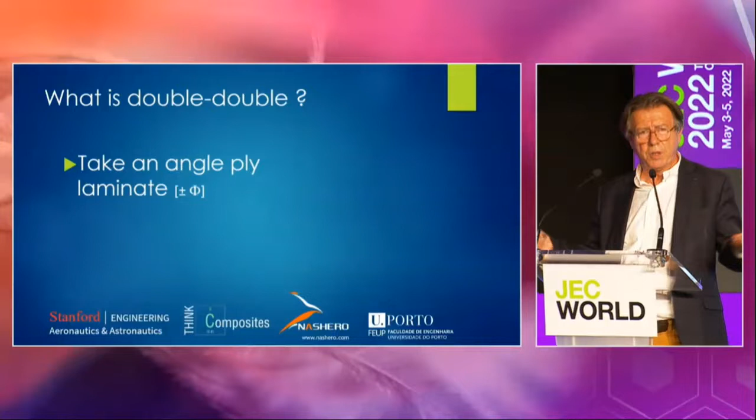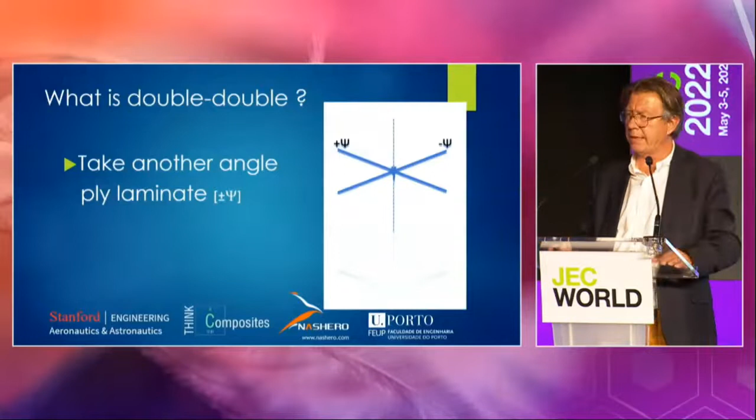So what is a double-double? What is behind double-double? It's a very simple concept. You just take an angle ply, two orientations of fibers on a material, and we call that plus minus phi. Then you take another angle ply, plus minus psi. So you have two angle plies, and you just stack them together, and you get the building block of a double-double.

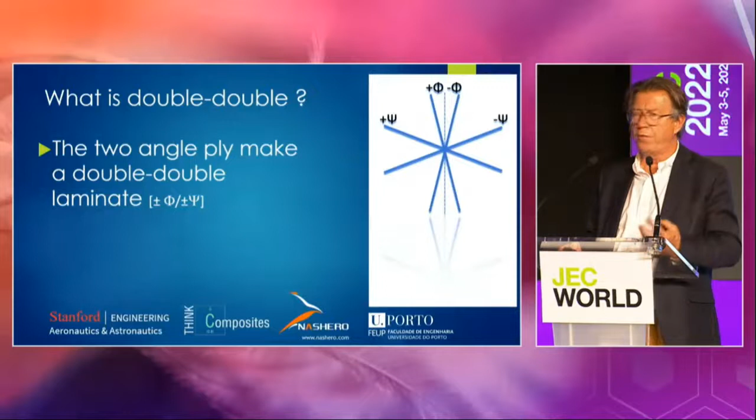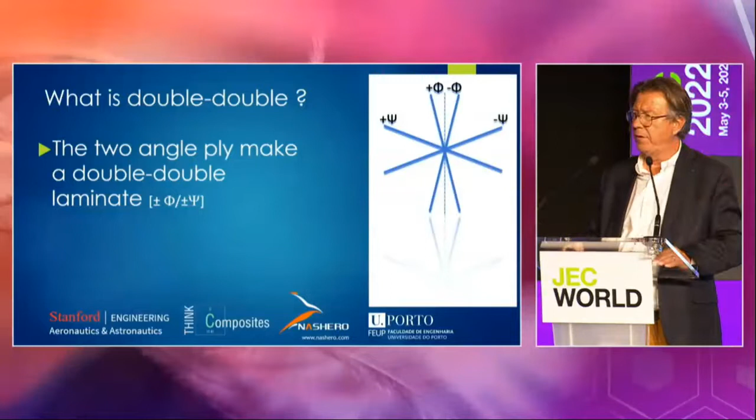The building block is a set of 4 plies: plus minus phi, plus minus psi. Phi and psi can vary from 0 to 90, so you have a continuous world of double-double. A double-double always has 4 plies. So your pattern, your building block, is always 4 plies, and you will see that this is a real advantage over any other laminate.

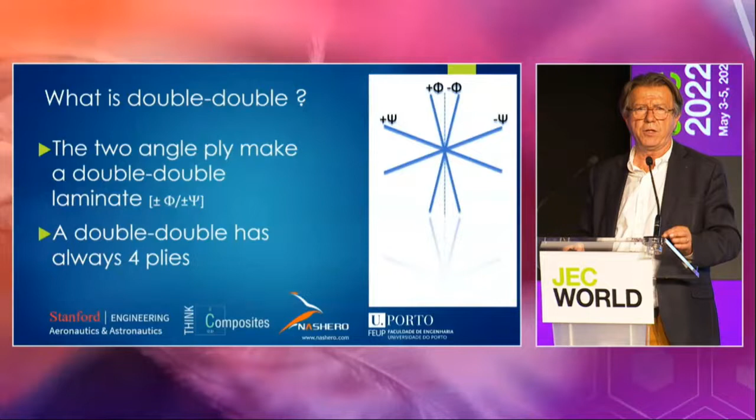And a DD laminate, for your use, is always built as a repetition of the building blocks of this 4-ply system.

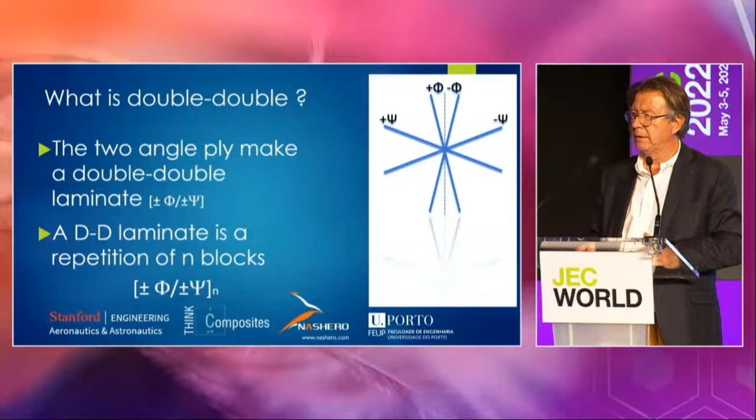So what is the comparison with the quad, for instance? In the top part of my slides, you see the classical quad. The most classical is the quasi-isotropic, 0, 90, plus minus 45. Then we have shown what they call the hard laminate with more zeros, and the soft laminate with more plus or minus 45. These are the basic laminates you always find in aeronautic applications - either quasi-isotropic, or when they need hard or soft, one of them.

But what you see is the number of plies in the building block is increasing as you go from left to right, whereas we can replace it with a double-double with exactly the same stiffness, exactly the same strength, but the building block is always 4 plies.

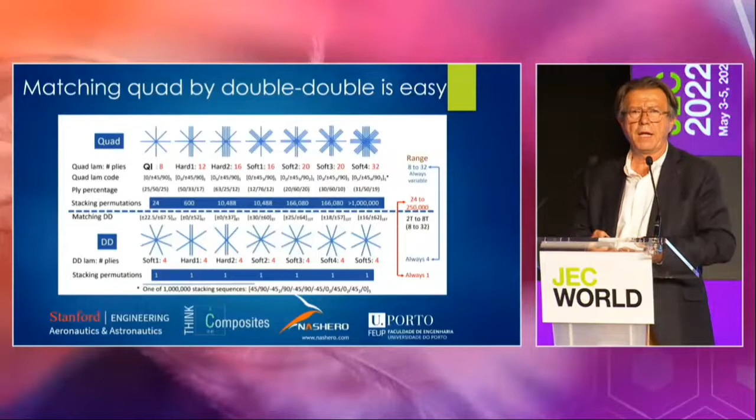So you get a very big advantage in the facility, the ease of construction of your laminate, because you always have the same pattern, and you just repeat it through your laminate.

So if we compare quads, and weigh the pros and cons for quads - quads are always difficult to design. It's not that easy. I've been doing that for many, many years when I was young, and designing a good quad takes a lot of numerical skill.

Manufacturing is not always easy because you need to check - how can you check and ensure that all your plies are here and in the right place? Tapering is almost a nightmare. If you want to go from a thick laminate to a thin laminate, which one do you take off? 0, plus minus 45 - how you connect these together, that's the nightmare for numerical designers.

So if you compare the advantages, you find there are not many advantages, and sometimes people just give up on composite materials because of this. When Airbus says sometimes the next plane will be aluminum, this is because of quads.

So if you turn to double-double, you see there are all those advantages: it's still lightweight, it's homogeneous - and that's a very important word, homogeneous - orthotropic, easy to taper, and easy to process. And suddenly the balance goes the other way, and this comes out the winner.

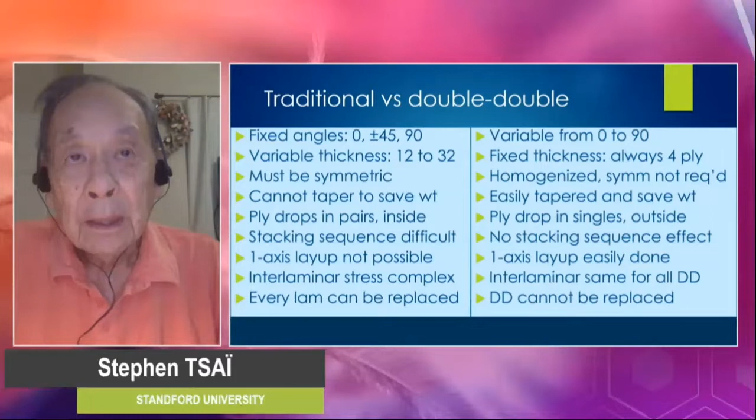The first slide will show the difference between traditional laminates and the double-double. As you can see, traditional is on the left, where you have fixed angles, 0-90 plus or minus 45, but variable thickness from 12 to 32. Whereas double-double on the other side has variable angles from 0 to 90 and fixed thickness, always 4 plies.

So when you have only 4 plies, you do not have to make the laminate symmetric, because you can homogenize it using a repeated number of stacks of the 4 plies. That makes it very simple. And you can taper it, reducing the number of repeats from 10 to 9 to 8, whereas with the quad you cannot do that.

In terms of ply drops, the traditional way has ply drops inside the laminate, whereas in double-double we can have ply drops as singles instead of symmetric pairs, on the outside. The stacking sequence is always a problem with quad, but there's no stacking sequence effect with double-double because there are only 2 possible stacking sequences, so the issue goes away. We can have one-axis layup with no cross-plying, and the interlaminar stresses, when homogenized, are the same for all double-double. Every laminate can be replaced by a double-double.

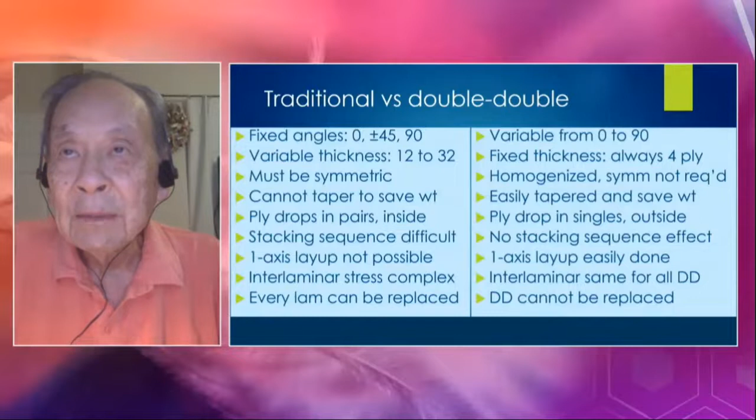May I have the next slide, please?

Here's the difference between heterogeneous quad laminates on the left versus homogenized double-double on the right. As you reduce the thickness to save weight, the homogenized double-double remains constant in properties, whereas the quad cannot.

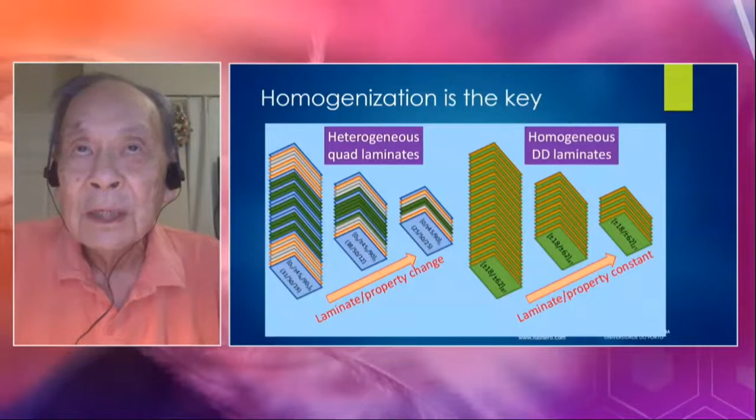May I have the next slide? Here is an example of how you can do a stringer, reported in the book in chapter 3. You can taper it from the toes, where you have the minimum number of plies, 4, up to the thickest section where you need it, which is 8 plies. So it's very easy to do.

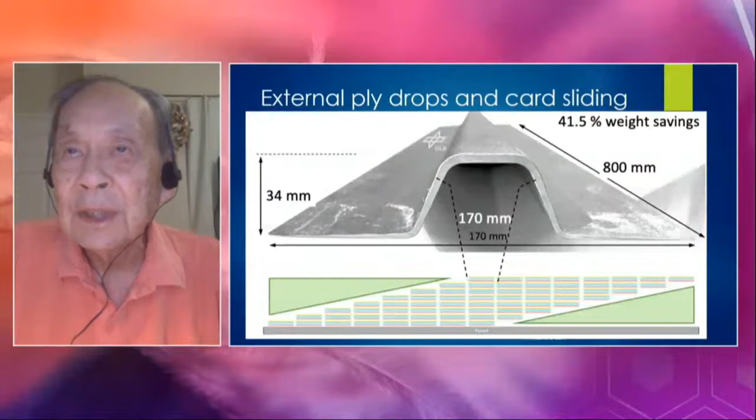This is done by card sliding, so in terms of layup it's very fast and less prone to error. In addition, you get the natural taper all on the outside. May I have the next slide, please?

So finally, we have a demonstration model showing the grid, and we are proposing to use a metallic grid, which is easy to manufacture using a water jet or fiber wire shaping. We take advantage of the negative thermal expansion of the skin at plus or minus 60, so you can assemble this by chilling both components and putting them together, without glue and without fasteners. The layup could be one-axis layup on the skin, done without any complicated tooling, and with no issue with molding and demolding and so forth.

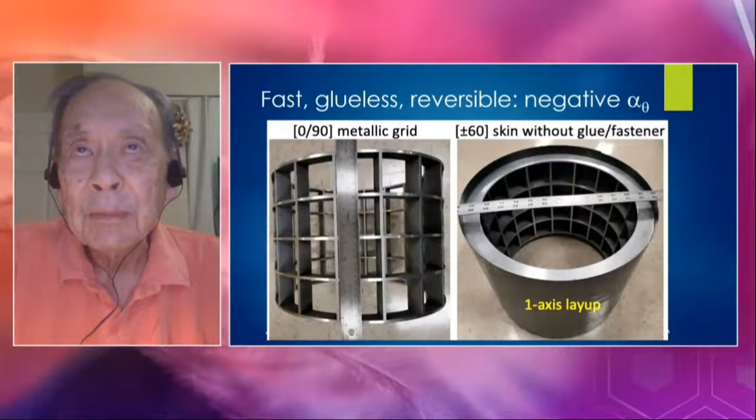So this is what we propose, and thank you very much for your attention. We will be around to answer questions.

Thank you very much for your attention.

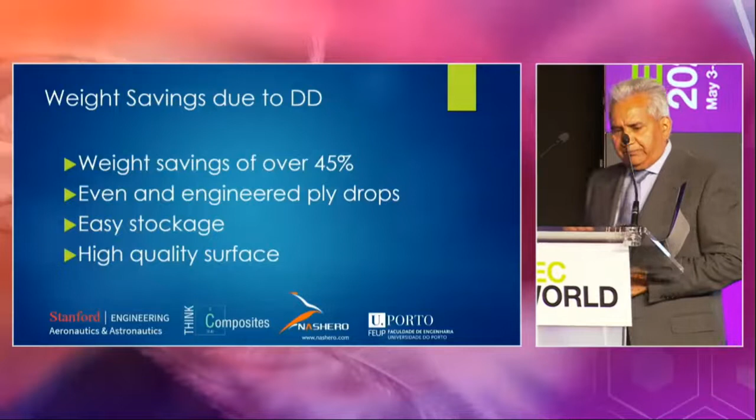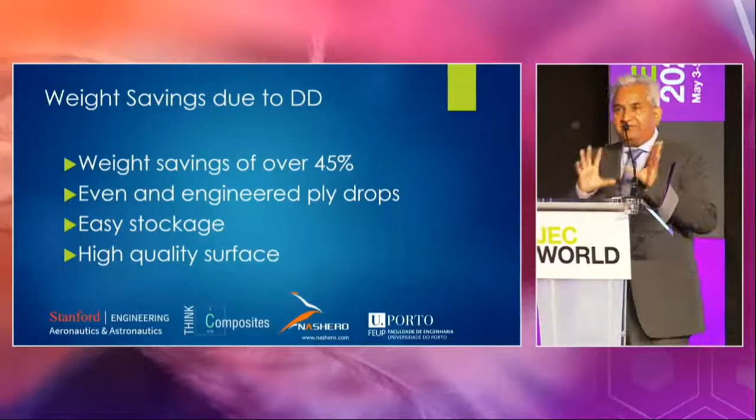If I can move to the next slide. So in the book, we have shown that weight savings of over 45% can be gotten from DD, because this is the only technology available today in the world that can allow you to halve the structural mass of a product. And when we talk about products, we talk about wings, fuselages, horizontal stabilizers, spars, skins, and all those things.

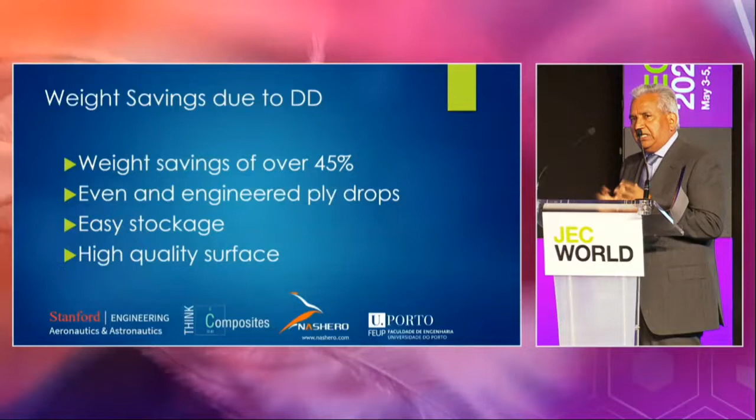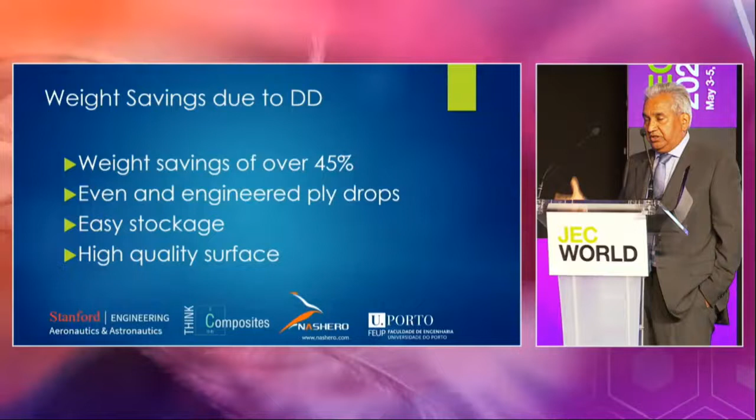So if you have weight savings of 45% over a modern Airbus 350, you'd be able to more than double the range, and you'll be able to save enormous amounts of carbon emissions, more than what we are trying to talk about today. We're talking about carbon emissions being saved by changing the engine, by consuming less. Weight saving is the primary cause, because you are carrying people. So if you have more capacity in your aircraft because you have reduced the mass, that's the biggest weight saving that you can get.

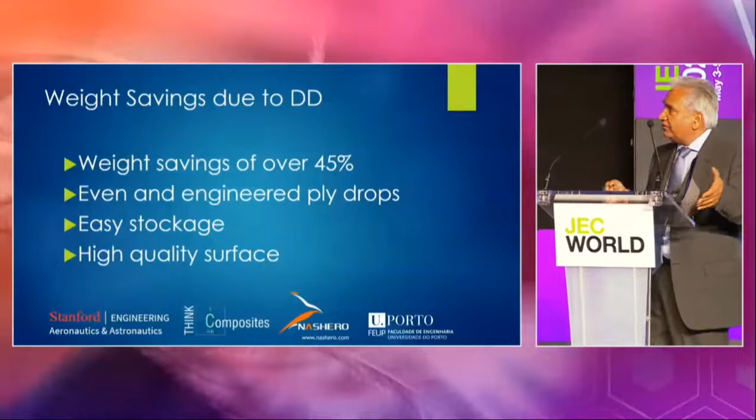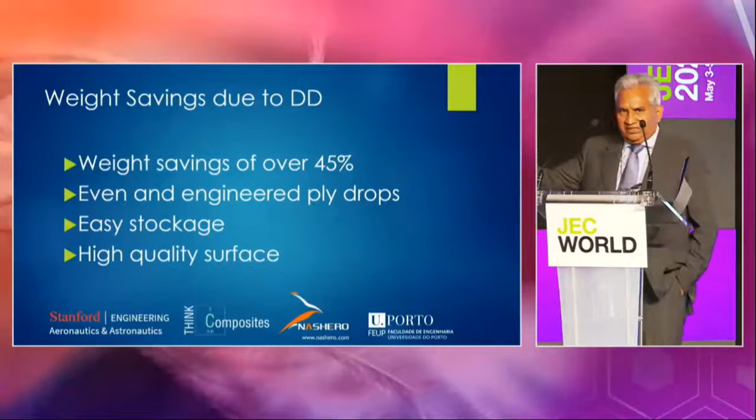And we have shown in the book the amount you can save. The other thing I would talk about is the amount of easy stockage of material, because now you don't have to stock many different kinds. I'm sure all of you are from the composites industry, and you know when you create kitting of an airplane or kitting of a part, it means cutting out pieces which are eventually used by your workers to do an assembly on the mold, using the laser or whichever technique you use to accurately make that part. In this case, you'd be using single axis layup. All the layup will be in one axis, and that makes stockage extremely easy. You're stocking the minimum number of materials that you need.

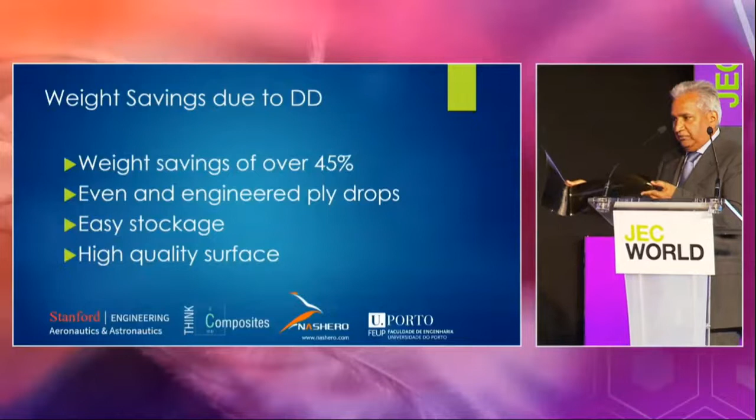High quality surface. So over here in this show, you will see many parts which will be exaggerated with clear coats to disguise the defects on the surface. This part I have made is out of DD. It doesn't have a single gram of paint on it. And I'd keep it over here for any one of you to walk over and take a look at the quality of the surface of this part. This is part of an actual airplane.

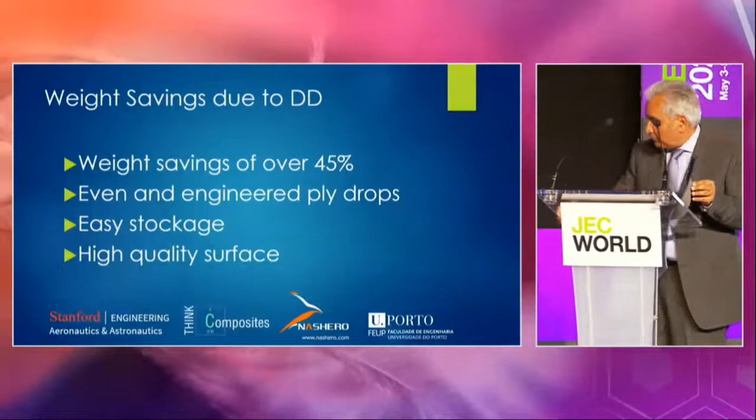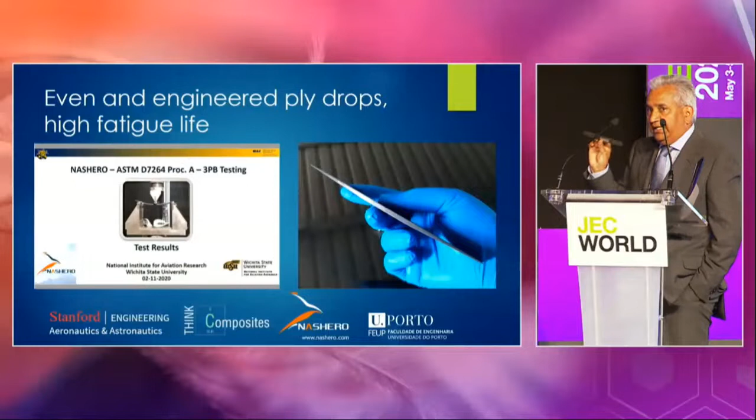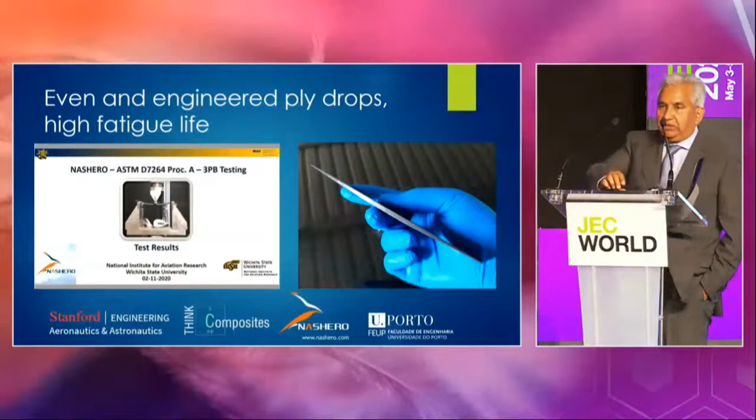So those were the things I wanted to cover. Let us go ahead. Now, one of the things I have brought for you to see is this tapered beam, which Professor Tsai just talked about. This was actually tested at NIAR, and it went 500,000 cycles. After 500,000 cycles, it was tested for residual strength. It was tested at 500,000 cycles at limit load, and then tested for residual strength. Its residual strength was the same as that of a pristine coupon. So we are talking about materials and technologies which allow you to get the maximum that you can out of composite materials. These are some parts that we have.

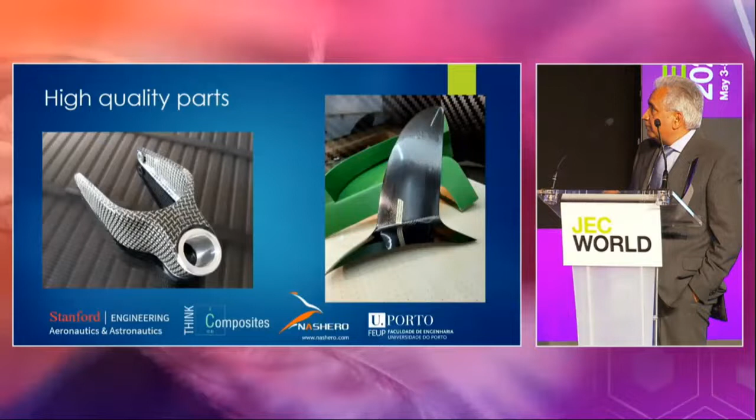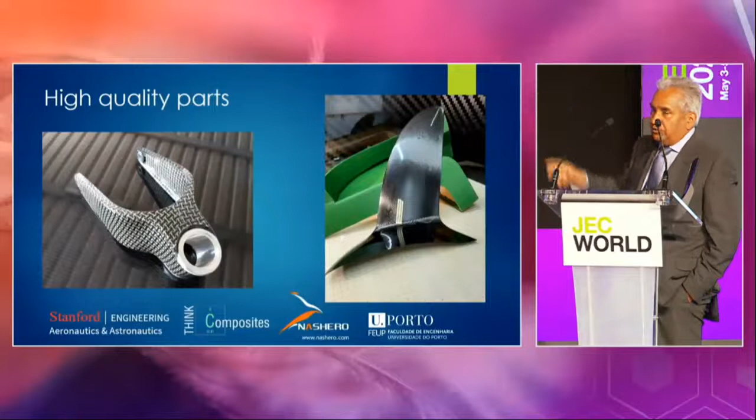That is an embedded part which, on the outside structure, is the fork of a landing gear of our aircraft. From outside it has hybrid Kevlar carbon material for crash protection, but inside it is a DD material, and it has embedded hard points. You can see the complexity you can get out of this. So this is what I wanted to talk about.

I will leave these parts over here, and you can take a look at them. These are some coupons that were tested at the laboratory of University of Porto by Professor Albertino, who is going to talk shortly. Thank you.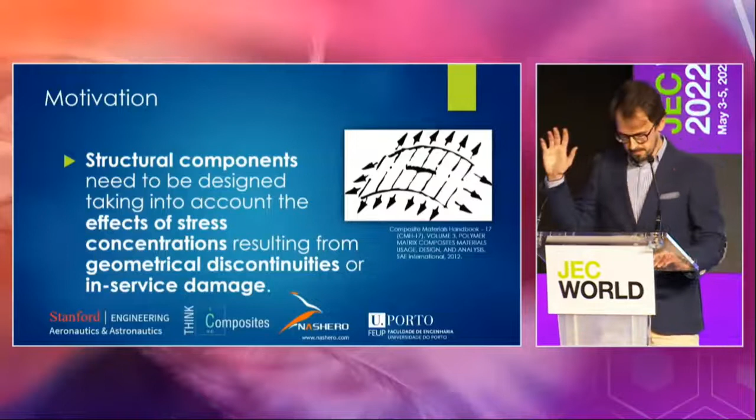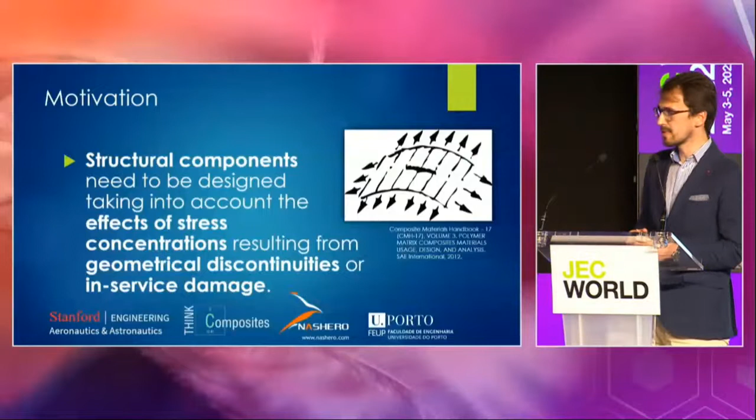Now, going to my focus today, that's on the notched response of double-double laminates. Regarding the motivation for this, I think this is pretty much clear. Structural components need to be designed taking into account the effect of stress concentrations, which may arise due to geometrical discontinuities like windows or access holes or holes for mechanical joints, but also from in-service damage, like, for example, when it comes to the penetration by a foreign object in the fuselage, for an open rotor aircraft, for example.

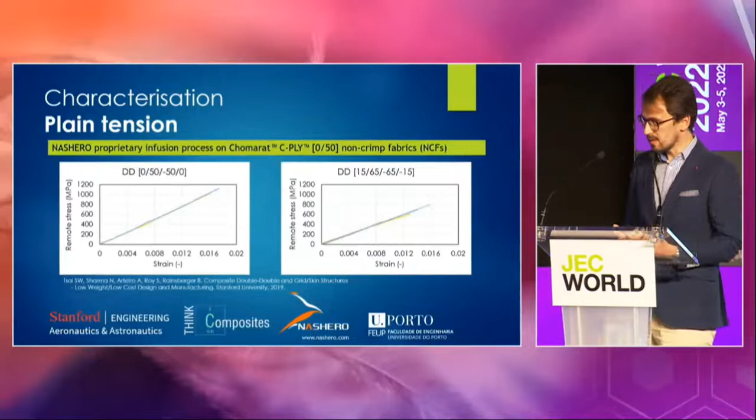If we plan to integrate double-double into this type of application, in terms of designing with these laminates and obtaining their design allowables, this is not different from what you would do with quad or legacy laminates, or it actually can even become simpler.

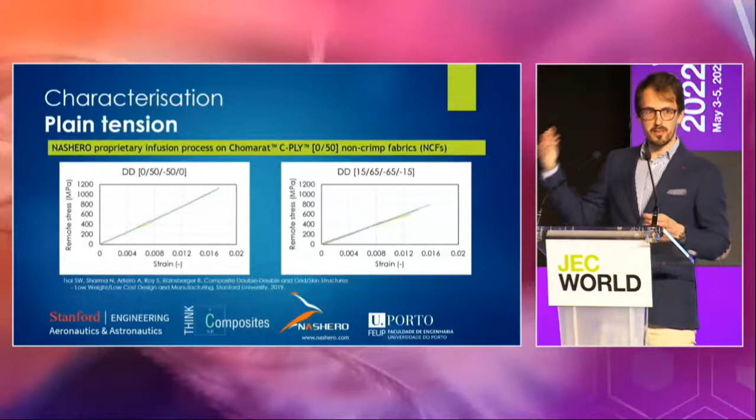So what I'm going to show you here is just a summary of some of the test data published in the previous and in the current book. These are specimens manufactured from non-crimp fabric C-ply by resin infusion by Naresh in his company, Nashero, using the same NCF building block in this particular case, that's a 0/50 NCF, which you can, for example, laminate as a 0/0/plus-minus 50, or as 15/65/minus 65. Although you can choose whatever is optimal to your design.

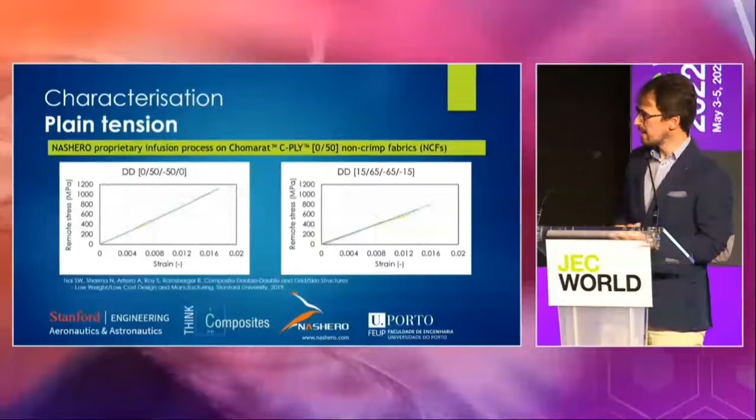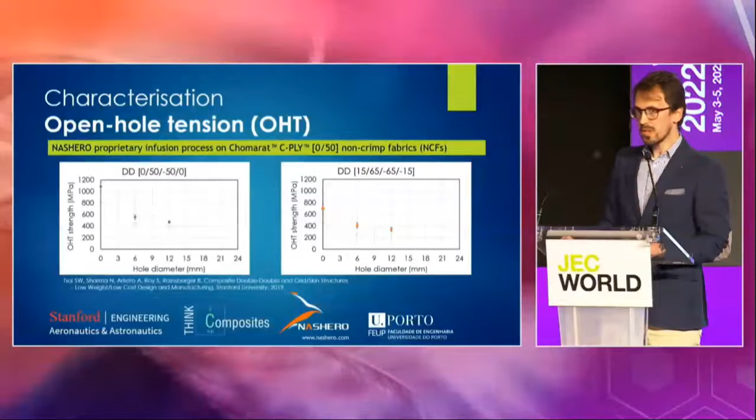Now the question is, what type of flexibility could double-double bring in terms of designing, for example, for notched strength of composite laminates?

To do this exercise, I take an analytical tool that has been applied and fully validated for notch tension and compression strength prediction of legacy laminates, and we'll be applying these in the context of double-double.

As I said, it's a closed-form solution based on a theory called finite fracture mechanics. Essentially, you have to solve a system of equations where in the first line you have a stress equilibrium in the sense of an average stress criterion, and in the second line you have an energy balance in the context of finite fracture mechanics, or fracture mechanics in general.

To solve the left-hand side of both equations, you just need the stress distributions around the hole and the stress intensity factor distributions for different crack lengths. These are things that you can get either from analytical solutions or from calibration in a finite element model if the laminate is too orthotropic.

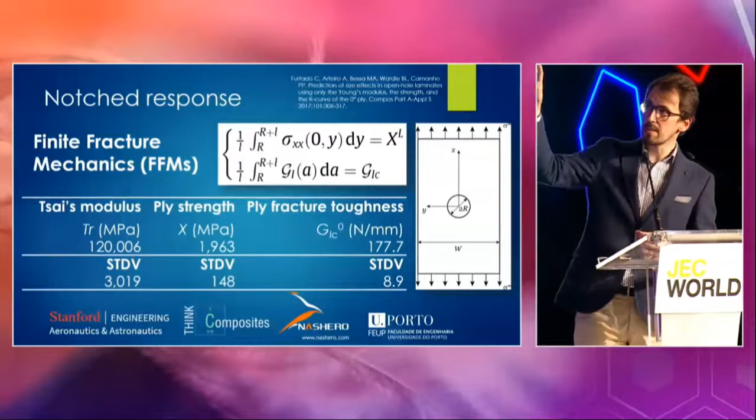On the right, what you have are the material properties, the required ingredients to solve the system of equations. So you have the laminate strength on top, and you have the laminate fracture toughness on the bottom.

Using other analytical technologies, including Tsai's modulus or the trace of the in-plane stiffness matrix, as Naresh was saying earlier, you can actually derive the laminate strength and the fracture toughness of any laminate using the ply strength and the ply fracture toughness.

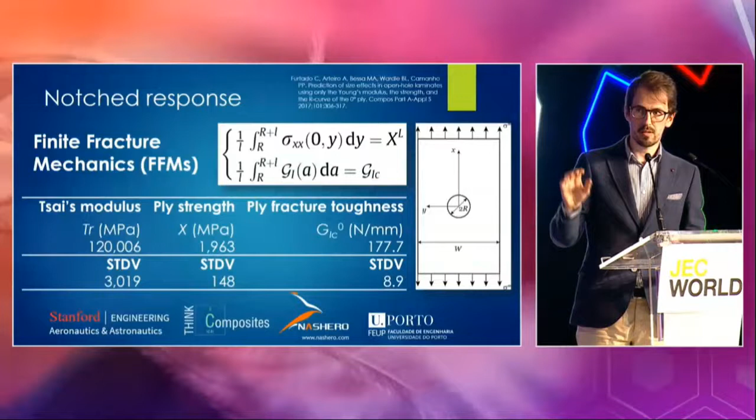You just need the strength of a unidirectional 0-degree ply and its fracture toughness, and then with Tsai's modulus you can actually derive those properties, and you can do that for legacy quad laminates, and you can also do it for double-double.

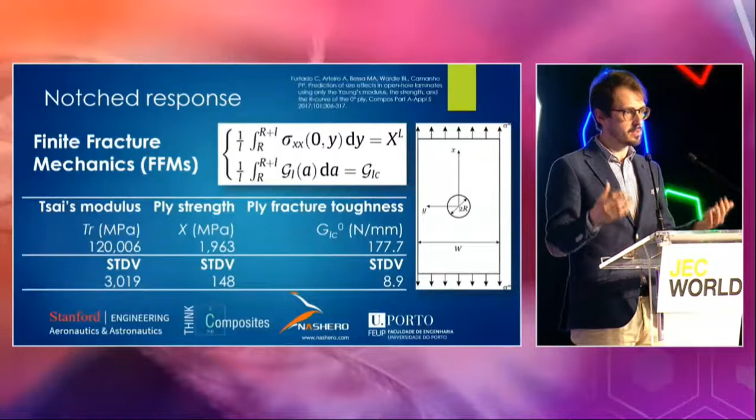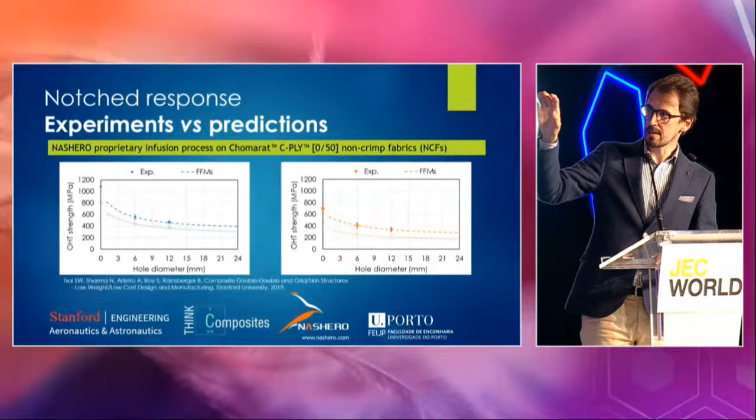So let's see how the predictions come out. These are the experimental results I've just shown two slides ago, and if we apply the finite fracture mechanics criteria to predict the notched strength or the notch size effect, you can see that they just match, they just overlap the predictions. Since you're bringing the physics into the problem in terms of stress equilibrium and energy equilibrium, considering both of them, you can really predict with a very good level of accuracy the notched strength of any laminate, including double-double.

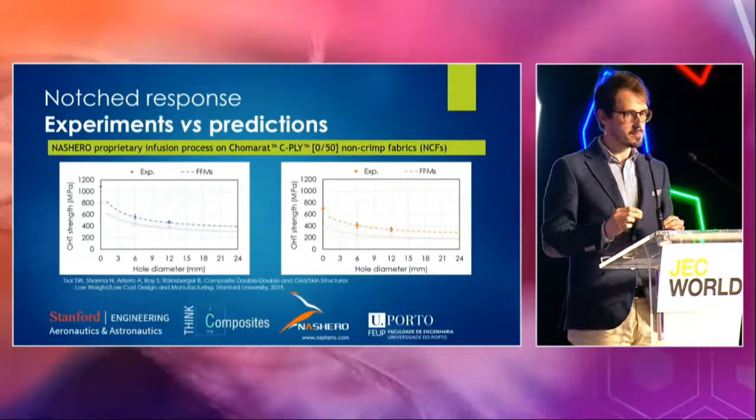Using only the strength and the fracture toughness of the 0-degree ply and Tsai's modulus. Now, what is the exercise that we can do?

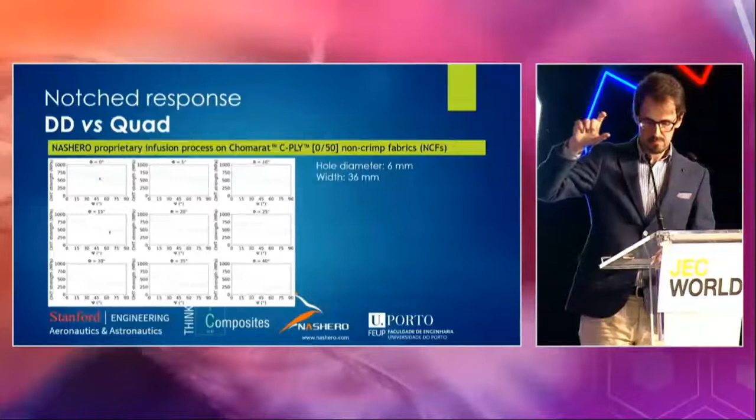Let's take different phi angles for the first angle ply, and then you can vary the psi angle for the second double. What I'm plotting there is essentially the band for the notched strength of those laminates on an open hole specimen with a hole diameter of 6 millimeters and a width-to-hole-diameter ratio of 6. You can see how the predictions come out.

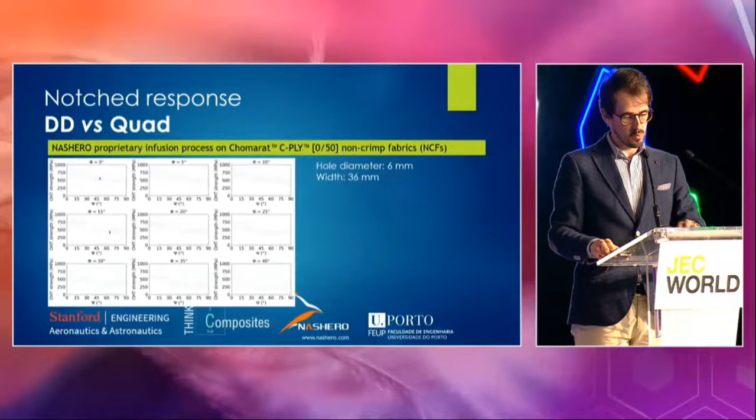The question you can ask then is, how would this compare with the notched strength of quad laminates, for example? I did the same exercise. Unfortunately, the colors probably don't show very well.

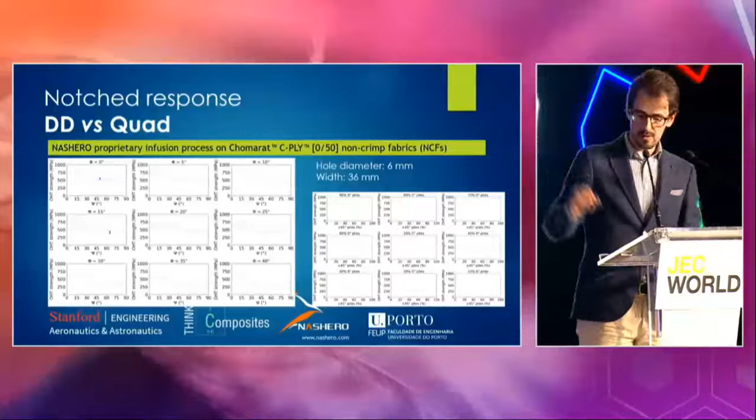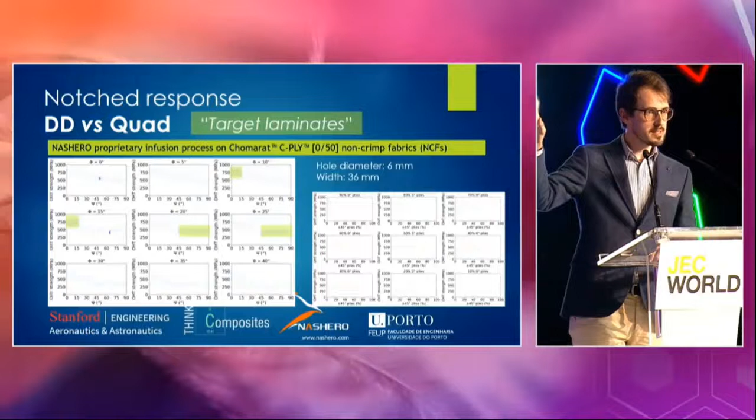In addition, if we pay attention to some of the curves on the left, we can even define other interesting concepts that can make certification rather easier, like the concept of target laminates. You can actually see that for some particular angle plies, there is almost no variation of the notched strength, or in other words, the notched strength is almost insensitive to the angle ply, or to the double ply angle.

Which means that if you want to derive the design allowables for your structure, you can probably select one of these target laminates, because in terms of confidence of the data you'll be getting, you are 100% sure of what you obtain, independently of the manufacturing technology that you're using.

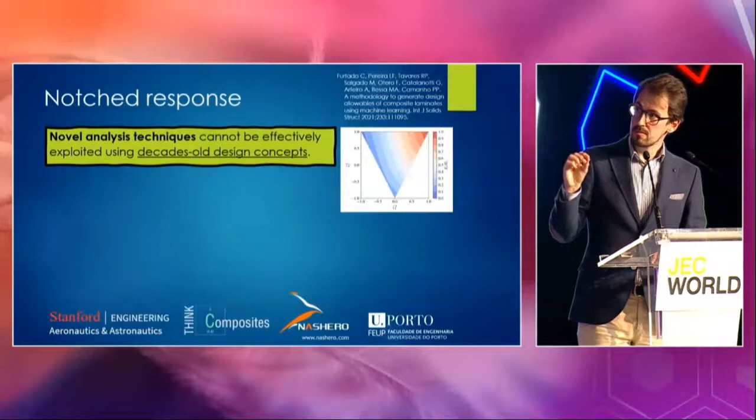To conclude, novel analysis techniques cannot be effectively exploited using decades-old design concepts, and this refers to the particular case of quad laminates.

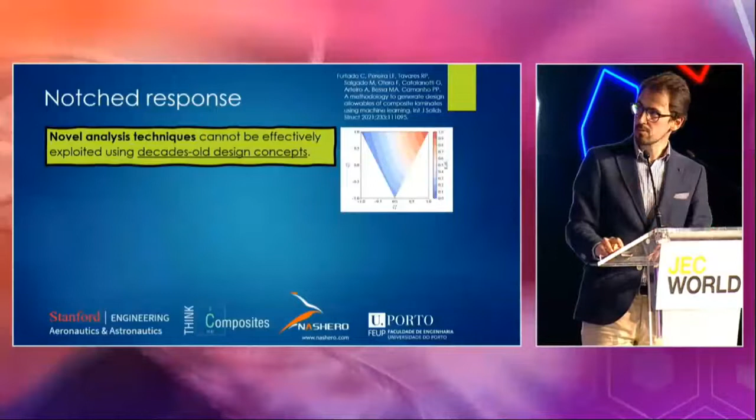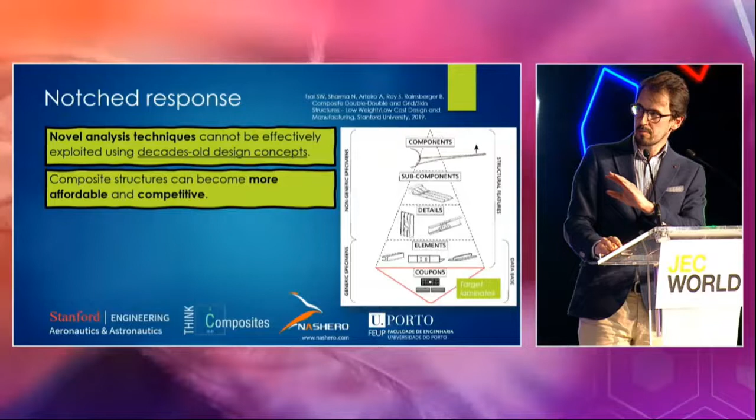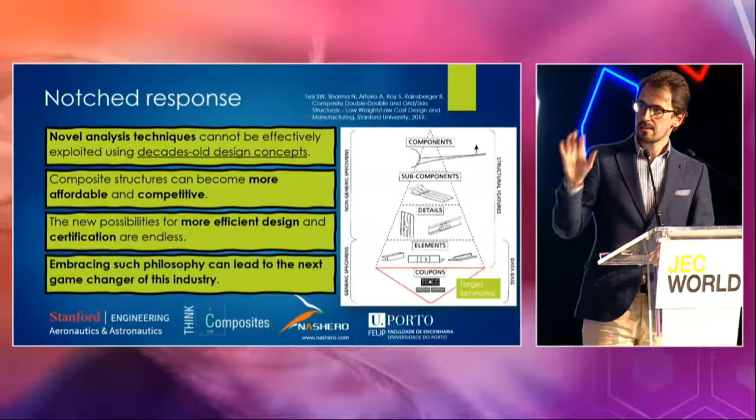Here you see the lamination parameters space. You can see that it's not a full space, so there are unfeasible regions, whereas with double-double you always have feasible regions everywhere. Composite structures can become more affordable and competitive with this type of technology, for example using the target laminates. The new possibilities for more efficient design and certification are endless, and embracing such philosophy can lead to the next game changer of this industry.